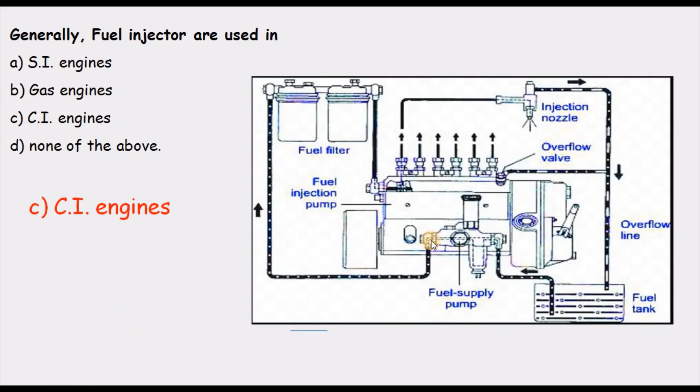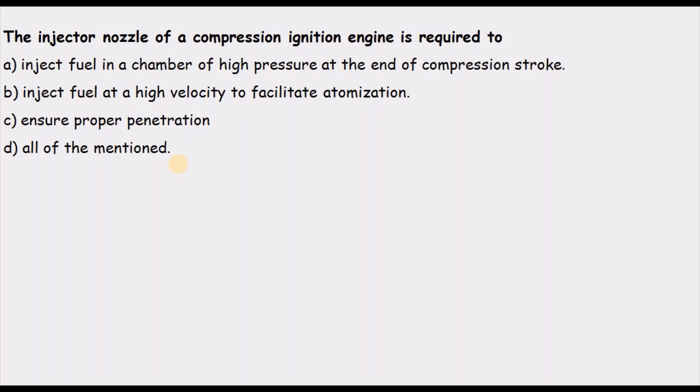For option B, inject fuel at high velocity to facilitate atomization: higher velocity and higher pressure of injection results in better atomization, and better atomization results in better burning of the fuel. So option B is also correct. For option C, ensure proper penetration: it is essential that fuel molecules penetrate into the highly compressed air so the fuel gets completely distributed inside the combustion chamber. So C is also correct. Therefore the correct answer is D, all of the above.

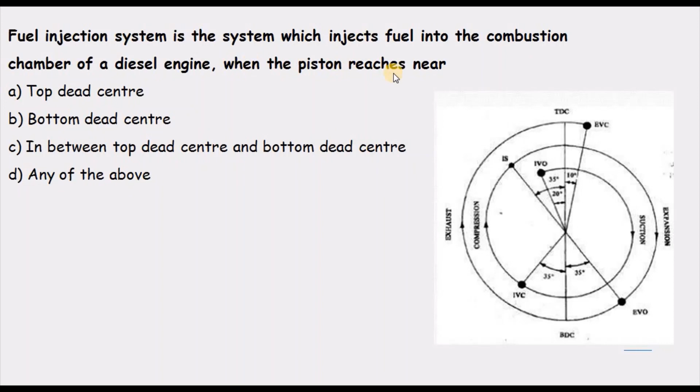Next question: the fuel injection system injects fuel into the combustion chamber of a diesel engine when the piston reaches near what point? Here we have the valve timing diagram of a CI engine. We have suction, then compression starts when the inlet valve closes. At the end of compression, nearer to when the piston is about to reach TDC, the injection of fuel happens. So this is the point where injection happens, which is near TDC. The question asks when the piston is reaching near what - the answer is A, TDC.

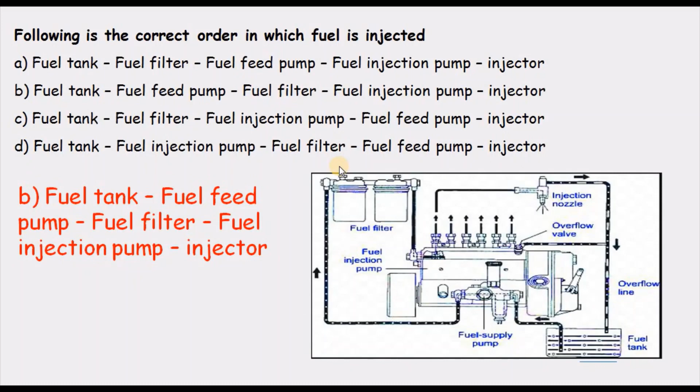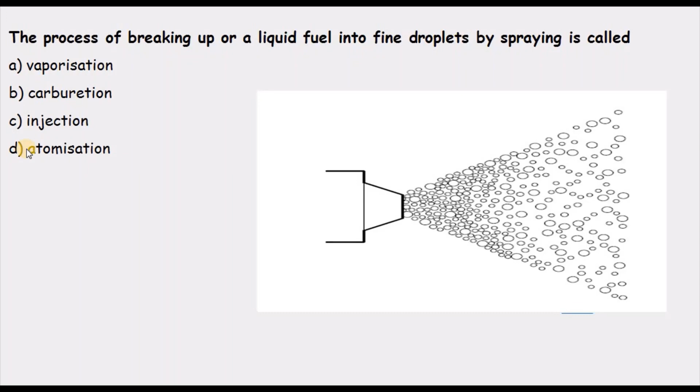The process of breaking up liquid fuel into droplets by spraying is called: the options are vaporization, carburetion, injection, and atomization. Vaporization is converting into vapor, not here. Carburation supplies the mixture to the combustion chamber in case of SI engine, so not related. Injection is the process by which we inject fuel into the combustion chamber, but here we are talking of converting the fuel into droplets, and that is atomization. So fuel coming from the injection chamber has to be converted into small droplets. That is what you call atomization. So the correct answer is D, atomization.

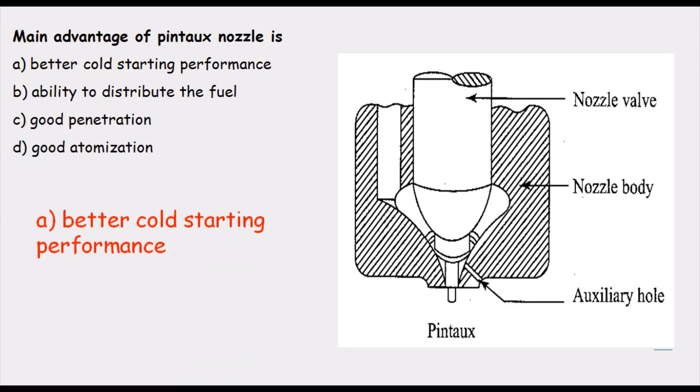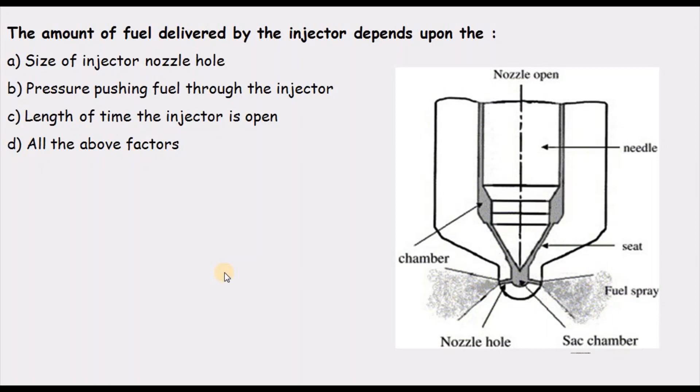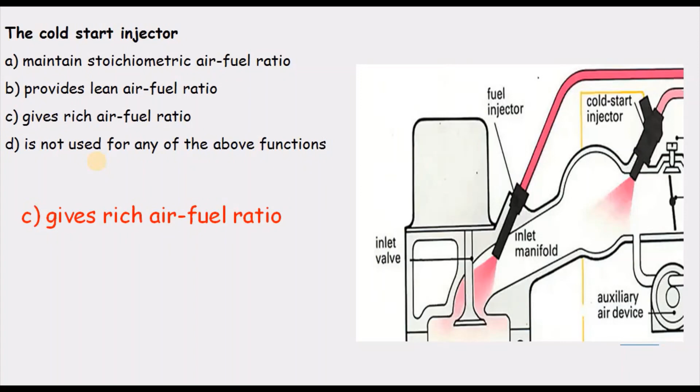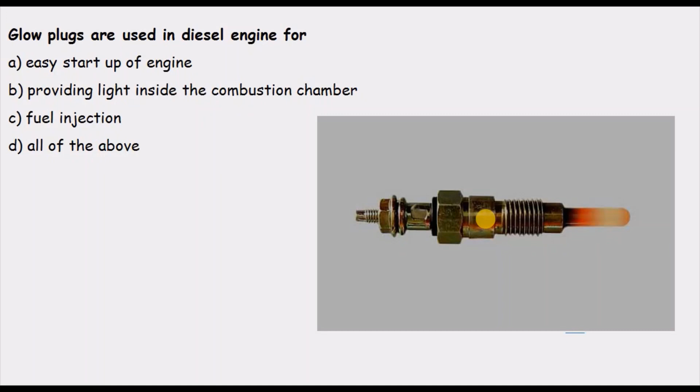Glow plugs are used to heat the air inside the combustion chamber for proper starting. So the correct answer is A, easy start of the engine.

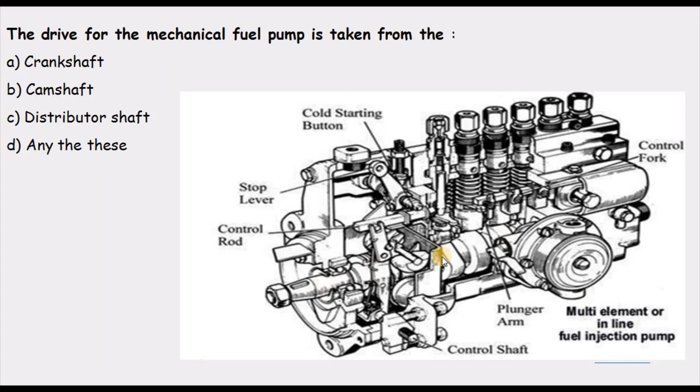The drive for a mechanical pump is taken from. Options are crankshaft, camshaft, distributor shaft, or any of these. Here you can see the shaft which drives the plunger elements for fuel delivery, operated by a cam lobe. Every cam lobe operates one plunger, and there will be one cam lobe for every plunger and element assembly corresponding to the number of cylinders. All this driving work is done by the camshaft. So the correct answer is B, camshaft.

For diesel engines, the method of governing used is. The options given are quantity governing, quality governing, hit and miss governing, or none of the above. Quantity governing is generally used in SI engines, where there's a throttle valve, and as it opens, more mixture is supplied to the engine, so we are changing the quantity of mixture for governing. In hit and miss governing, we miss some of the cycles so that governing happens - to increase or decrease, we miss certain strokes. So this is not the method used. What we have is quality governing: keeping the air inside the combustion chamber constant, we increase or decrease the quantity of fuel being injected. Thereby we are changing the quality of the mixture, so such engines are called quality governed engines. The correct answer is B, quality governing.

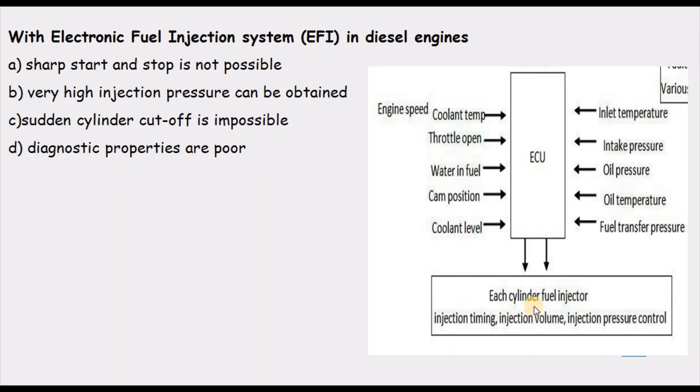Sharp start and stop is not possible - actually it is possible because whenever we open it, we can start or stop. Sudden cylinder cutoff is impossible - no, it is possible because when we stop that supply, we operate the valve and can cut off the supply. So this is a wrong answer. This is also a wrong answer. Diagnostic properties being poor has nothing to do with it. So the correct answer is very high injection pressure can be obtained - we can obtain very high injection pressure with electronic fuel injection. The correct answer is B, very high injection pressure.

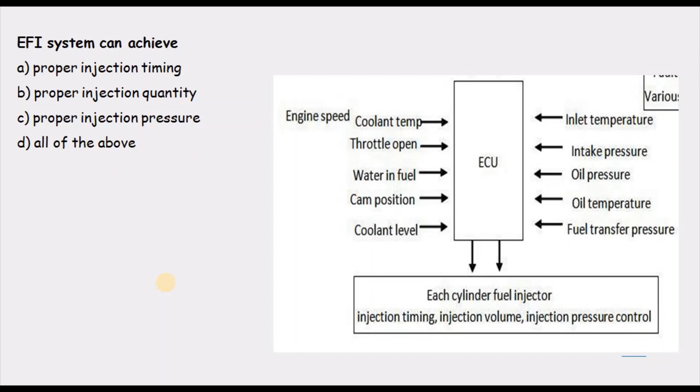EFI, electronic fuel injection system, can achieve - the options are proper injection timing is possible, proper injection quantity is possible, proper injection pressure is possible. So the correct answer is all the above. With the electronic fuel injection system, we can achieve proper timing, quantity, and pressure. So the correct answer is D, all the above.